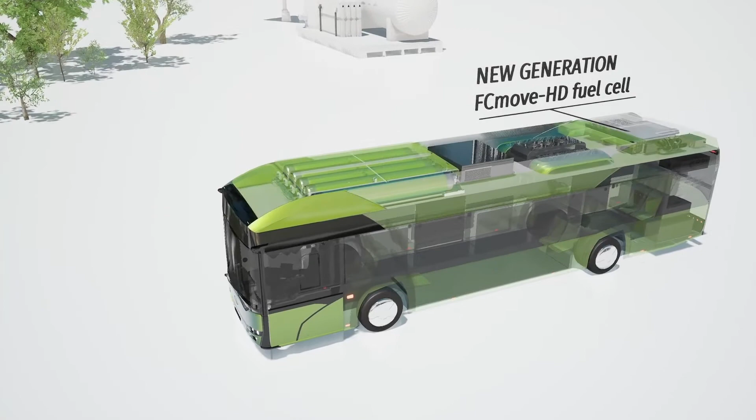Okay, well, we have discussed a little bit about the history of the fuel cell. We have discussed a little bit about hydrogen, but now we should focus on what happens inside the fuel cell, inside this small magic box. So, if you think about the fuel cell, it's not only a fuel cell, it's a fuel cell assembly. Inside, you have fuel cells grouped in the stacks, but also you have BOP, which stands for balance of plant. And these are the components which are responsible for the fuel cell to work.

So, on one hand, you've got a part of the hydrogen system, which is made often of HRB, which is the hydrogen recirculation blower, which is needed for transferring the hydrogen from the cylinders to the stacks. The other thing is that for the whole operation, you also need an air preparation system, which is responsible for delivering the air to the fuel cell. And because of the chemical reaction happening inside the fuel cell, you also need cooling components. From our point of view, in our fuel cell assembly on the bus, you have part of the cooling system, which is the pumps and different valves.

So, when you think about the fuel cell and the fuel cell assembly, please remember that all those components might be inside one place. And if you think about this box and its volume, please remember that this box which is making this power is almost the same or even a little bit smaller than the volume of a standard diesel engine, which is very important for assembly on a bus. But on the bus, we've got different other components which are used for making the bus move.

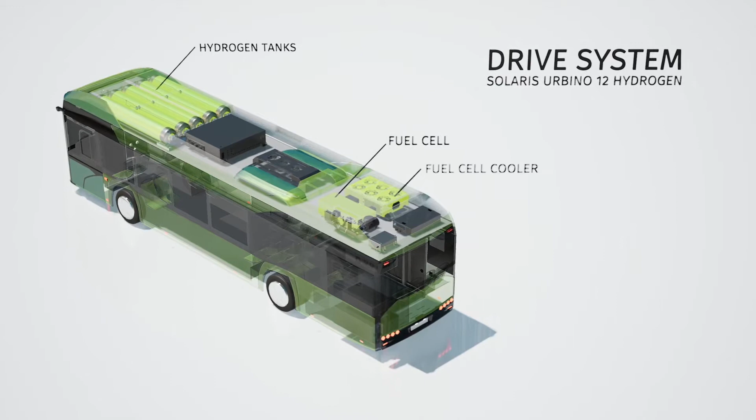From our point of view, you have the fuel cell, and with the fuel cell you have to take the hydrogen tanks. At this moment on our bus, we are using the newest technology, which is Type 4 hydrogen tanks. Besides that, to cover the heat generated by the fuel cell, you have to use a cooling radiator, which on our bus is assembled on the roof. Next, when you make power from the fuel cell, you have to handle the electricity. So we are using a DC-DC converter to change the voltage of the power generated from the fuel cell to the voltage used on the bus.

And for that, we have a traction converter, which is responsible for changing the direction of the flow of electricity, depending on the needs. This electricity may be sent to the batteries for recharging, but can also be sent directly to the axle, which is responsible for driving the bus. And this is the most important fact about our bus, because this is not a classic range extender hydrogen bus. It's a real fuel cell driven bus.

Besides those components, when we think about all the other main components assembled on the bus, we have to remember our air conditioning. On our hydrogen bus, we only use CO2 air conditioning with a heat pump, which means that they are working on CO2 refrigerant, which is the least harmful to the environment today.

So it has the global warming potential of 1. When comparing to other refrigerants, this is the smallest number ever.

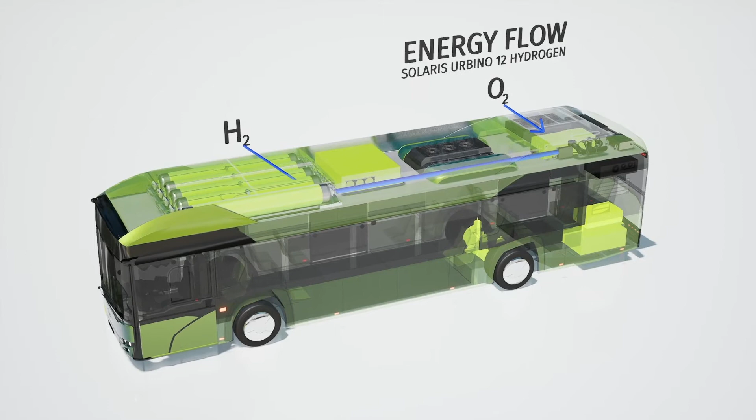But what really happens during driving, and what is the energy flow on the bus like? At the beginning, you have to deliver the hydrogen and the oxygen to the fuel cell. In the next step, inside the fuel cell, electric power and heat, and water steam, a combination of those three aspects, is generated as a result of a chemical reaction.

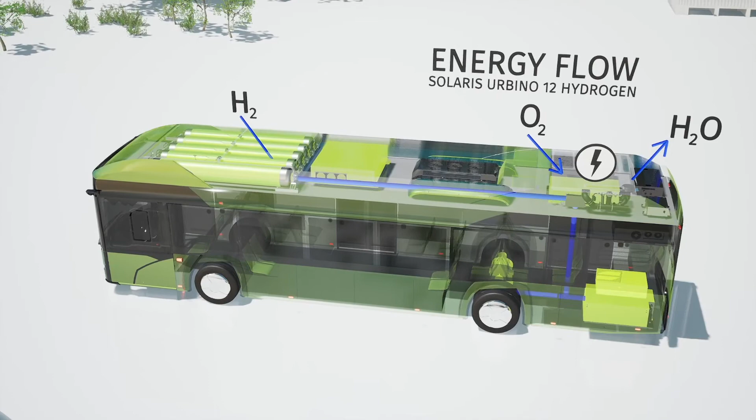The generated electricity is sent to the DC-DC converter and then to the traction converter, and depending on the needs, to different components. Because of that, our bus is moving without any signs of emission. And this is a general overview of the bus.

But when we focus really on the fuel cell, we can explain in a very short way how it works. As we have been saying before, at the beginning, the hydrogen and the oxygen are transferred to the fuel cell. The hydrogen reaches the catalyst and splits into protons and electrons.

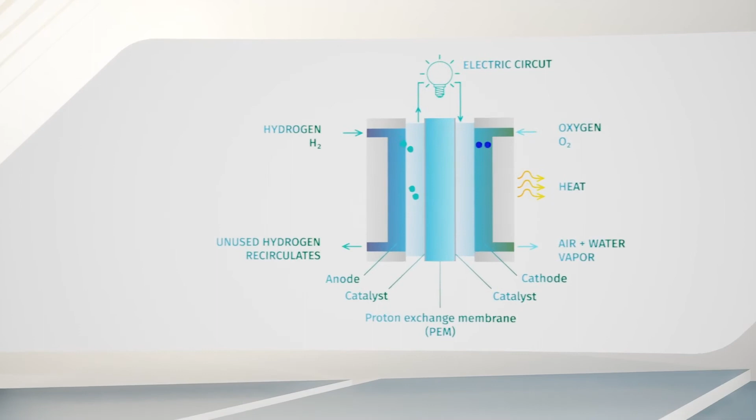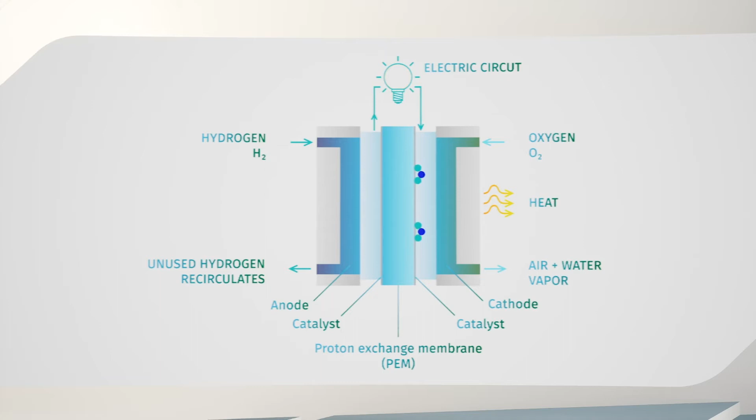And because we are using a PEM fuel cell, which stands for proton exchange membrane fuel cell, it lets through the protons to permeate to the other side. The electrons are captured and sent to an external circuit, where the circuit leads to our bus and to the DC-DC converter. The protons of the hydrogen, which go to the other side, to the catalyst on the cathode side, then contact the oxygen and create water and heat.

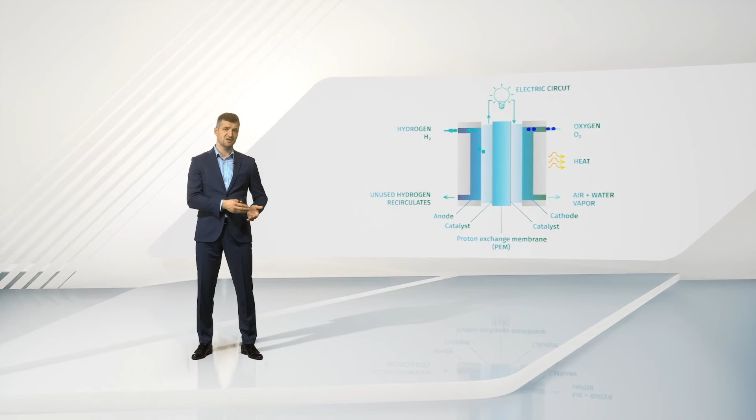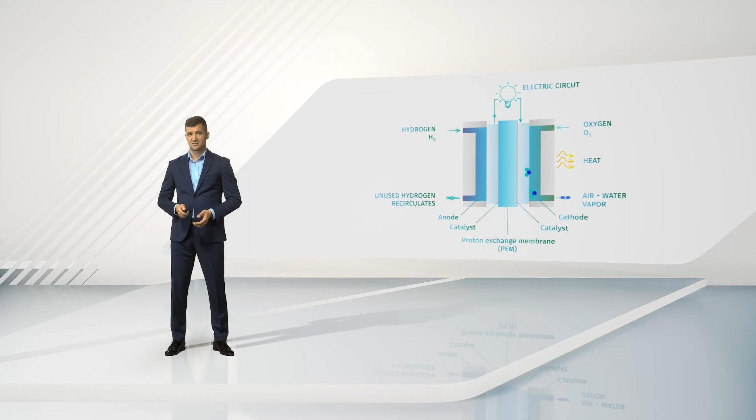And this is how the fuel cell mainly works. So, as we have been saying before, on one side you have clean hydrogen and clean oxygen, and at the exhaust side you just have a little bit of water, and that's it. This is the way the fuel cell is working today.

Depending on different suppliers, the fuel cell may have different parameters, and also it's because you have different needs. In our bus, we are using a fuel cell with power of 70 kilowatts. The efficiency of the fuel cell is very high, up to 57%, and the estimated lifetime of a fuel cell is over 30,000 working hours.

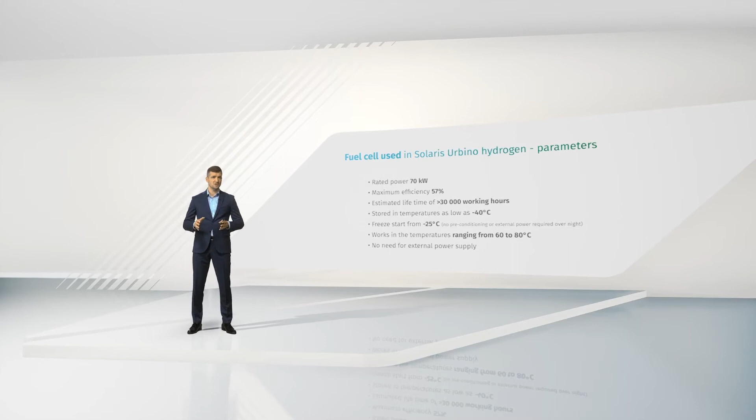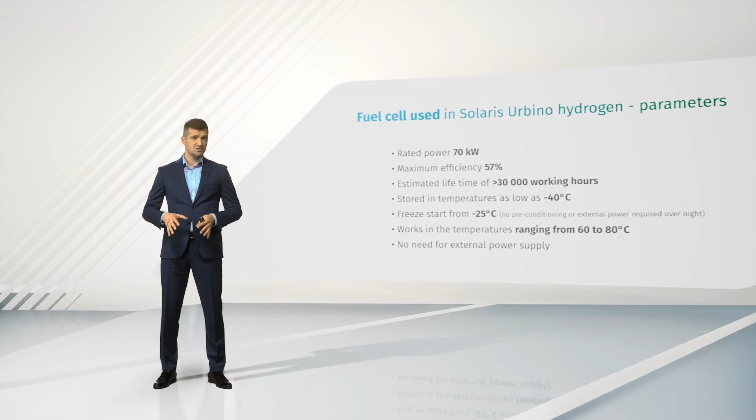Of course, except that, the fuel cell has different advantages. The one which we are using now is the 7th generation of fuel cells from our suppliers, so they have really spent plenty of time working on it.

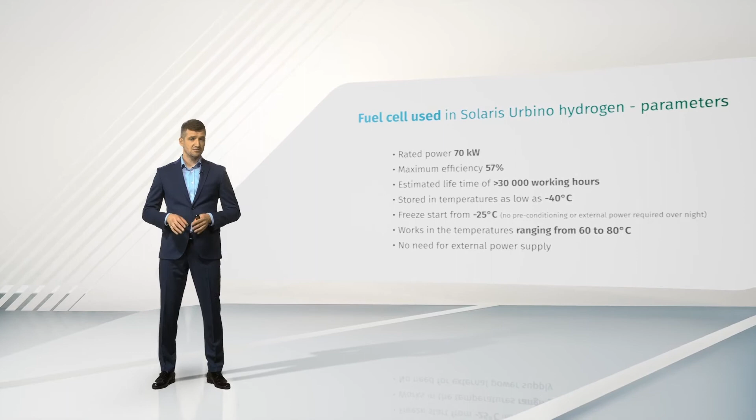So what we can say today also is that the fuel cell might be stored in very low temperatures. It can be stored down to minus 40 degrees. And when you are operating the bus, it can be operated from minus 25 degrees up. This is very important because previous fuel cells used to need power supply before taking off with the bus.

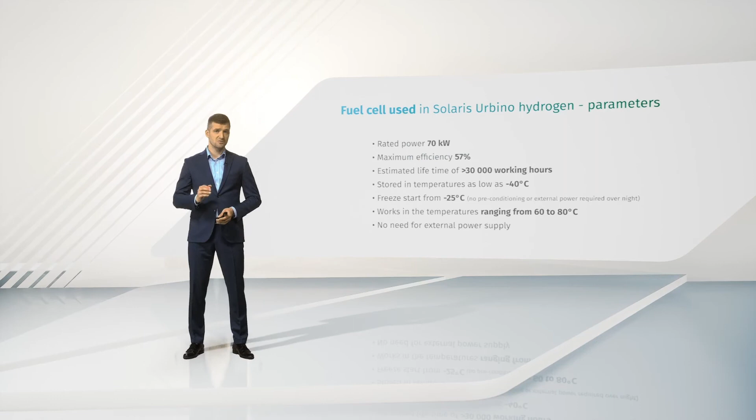Which means if you wanted to drive, you had to connect to an external power supply or do something different to heat the inside of the fuel cell a little bit. Today, our bus doesn't have to have any operation like this. It's just working as you want it to from minus 25 degrees up.

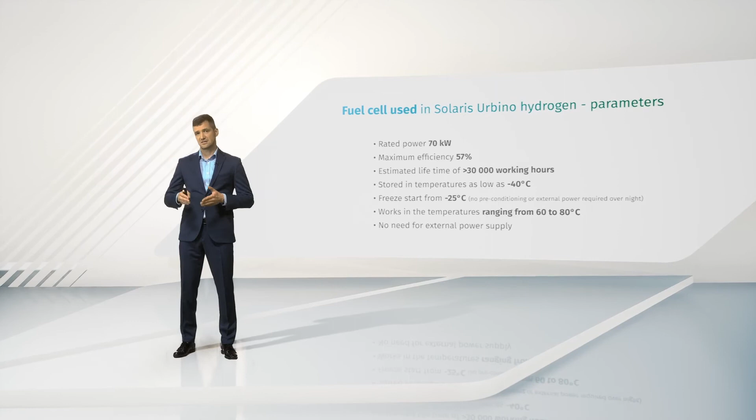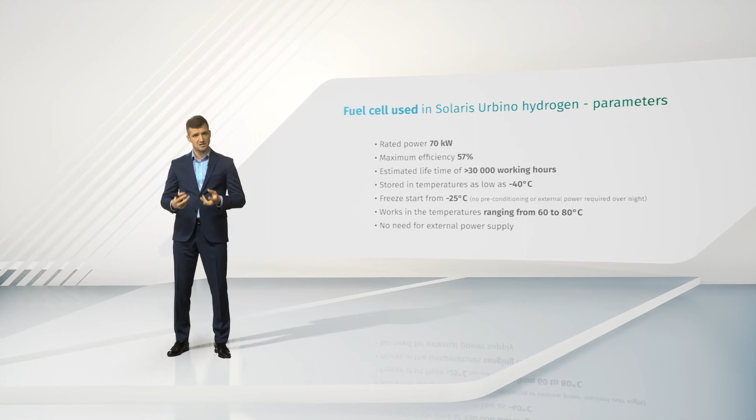Another important thing when we think about the fuel cell is the coolant temperature inside. It's also much closer to the coolant temperature which you have today in the diesel engine, so taking heat from this coolant is much easier than it was before. The coolant temperature range is between 60 and 80 degrees inside the fuel cell.

And this is one thing, the fuel cell. But in our world today, there are different manufacturers of the fuel cell. Depending on the customer, depending on the manufacturer, there are different reasons and different options to make it the way the customer wants it to have.

But this is not the best solution. That's why we are joining today StasHH, which stands for Standard-Sized Heavy-duty Hydrogen. We would like to finish this program together and have a very good product in the end.

And he goes to the back, comes back in half an hour and says, sorry, we haven't got those. This is just imagination, because today you go to the shop and buy an AA battery. Imagine now if it was the same with the fuel cell - if you want a fuel cell of type AA, you put it on the bus, connect it, and it works, from different manufacturers. In the end, the market is so big, there are so many AA-sized fuel cells that you can make more of them, more buses, more different applications. This is the reason why we are in StasHH, and why we think StasHH will succeed.

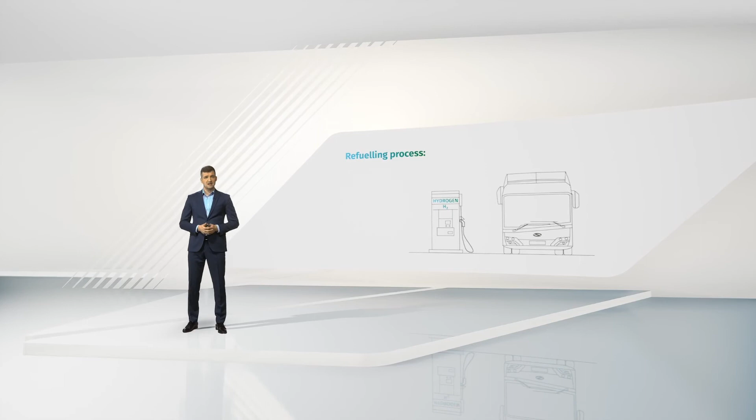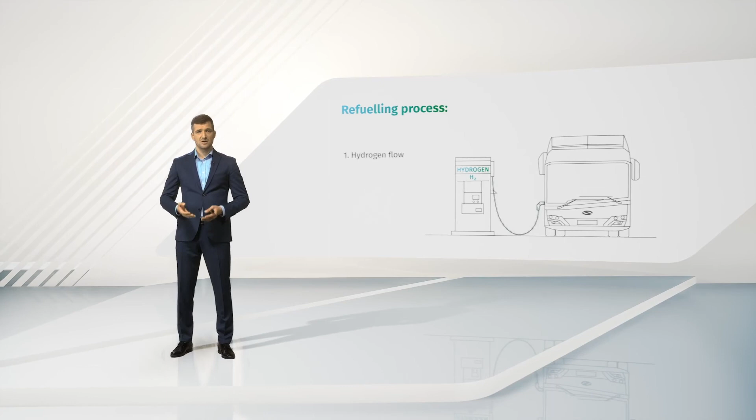But we have described fuel cells, buses, different projects. But one more thing we should remember is the hydrogen which is going to be sent to the bus, because you have to refill the bus. From our point of view, on Solaris buses, you have a nozzle capable of a very high flow, and this high flow can be up to 120 grams per second.

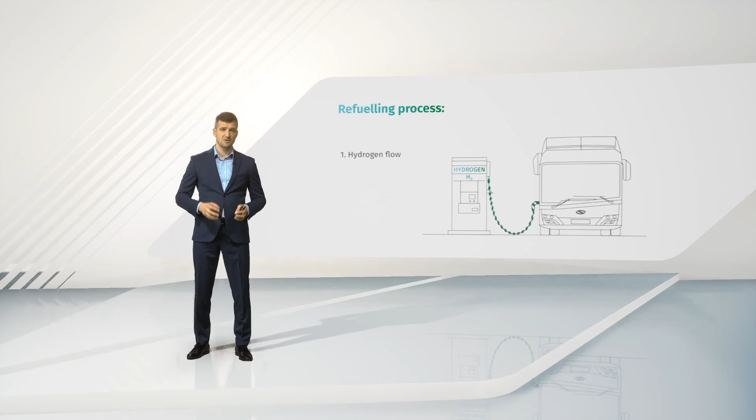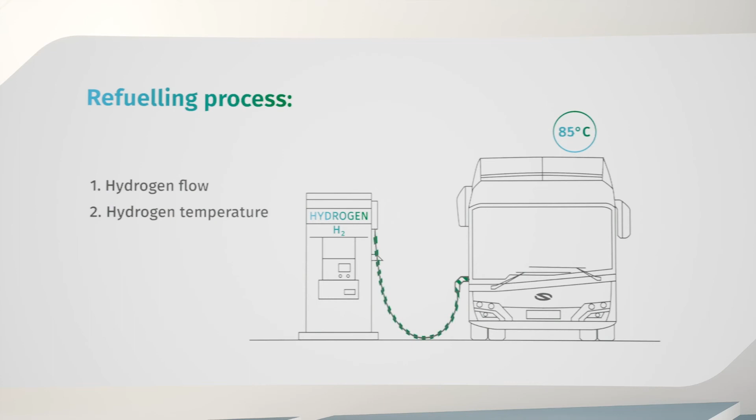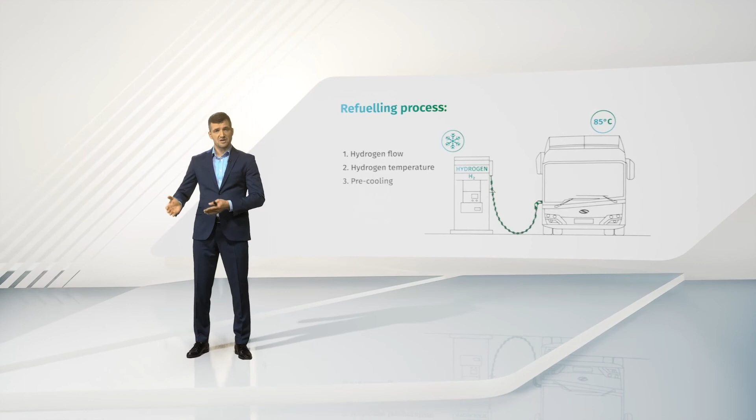But as usually happens, when you compress hydrogen inside the cylinders, it heats up, and you also have to remember the temperature of the hydrogen inside the bus cannot exceed 85 degrees. So to have better performance during refueling, we recommend having some kind of chilled hydrogen at the hydrogen refueling station. Because of that, you may have all the advantages of the high flow of 120 grams per second, and the capacity we have today of 37.5 kilograms on the bus.

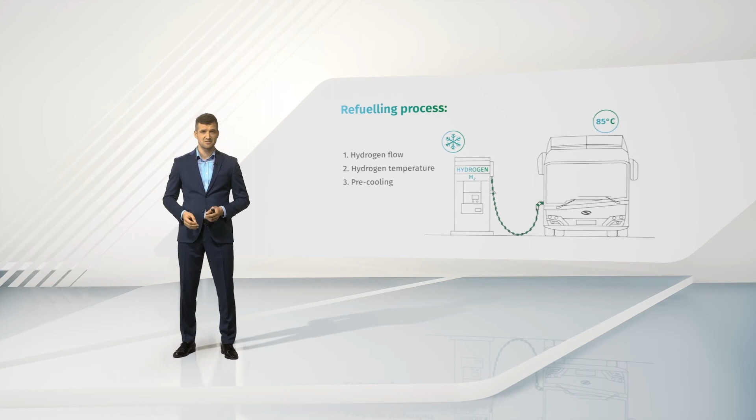If you make a short calculation, you'll know you can refill the bus in less than 6 minutes. But the 6 minutes can only be achieved with pre-cooled hydrogen. But that's another side of it.

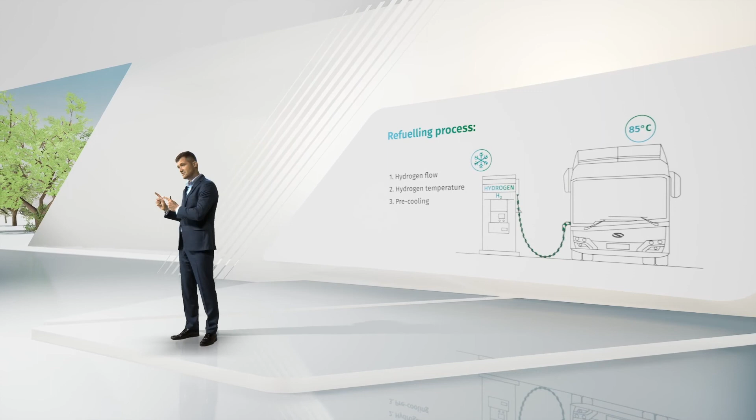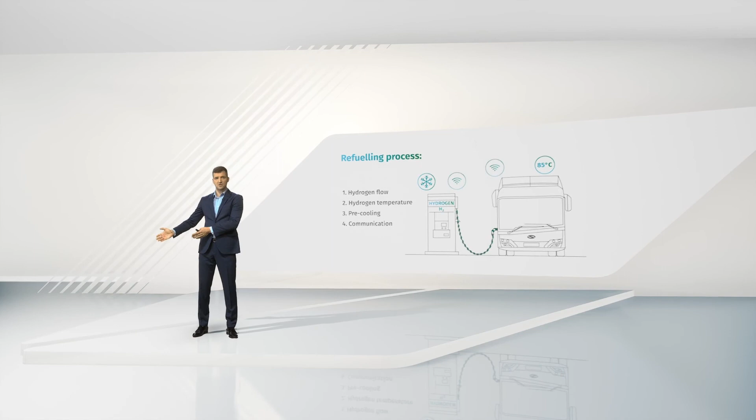The other thing is that when you refill the bus, as we've been saying, the flow goes to the cylinder and heats up a little bit. It's always good to let the hydrogen refueling station know about that. That's why we have communication between the bus and the refueling station, letting it know about the temperature of the hydrogen in the bus, the flow of hydrogen to the bus, and the amount of hydrogen already in the cylinders. Because of this communication, you can refill faster, better, and more efficiently.

From our point of view at Solaris, we always have this option on our bus, and we have had that option since 2014 when we made the first buses.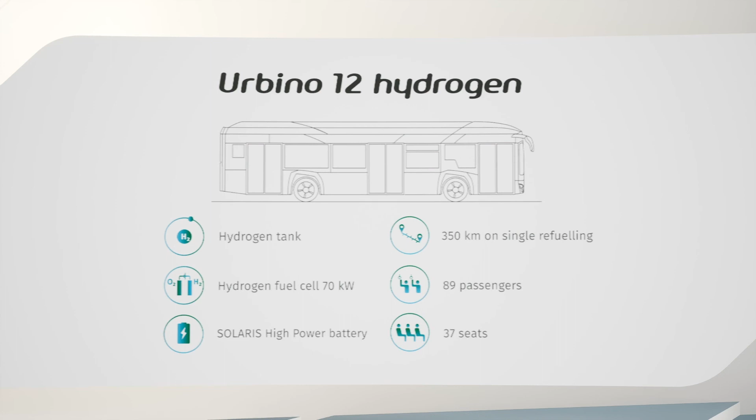So to sum up our solution, when we think about our bus, we use the newest technology when it comes to hydrogen tanks - we have Type 4 hydrogen cylinders. The other thing is we use the exact amount of power from the fuel cell that we need, which is 70 kilowatts. That, added with Solaris's high-powered traction battery, capable of very fast discharging and charging, gives you a very good bus with a total range of about 350 kilometers depending on circumstances and environment. You can carry up to 89 passengers with 37 seated.

When you compare these kinds of buses between electric and hydrogen, for example, you can see what the difference is regarding passengers.

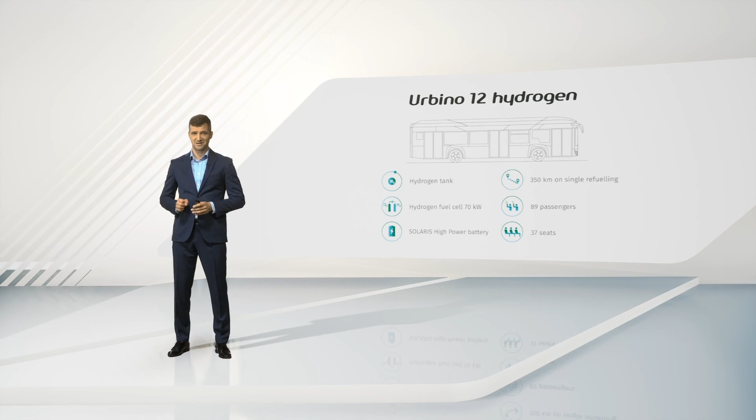So what is important on the Solaris Urbino 12-meter hydrogen bus? You have an extended range, very fast refueling, and a reduction of energy because of the CO2 air conditioning and other components, and altogether it's made in an efficient, free drive mode.

This is the reason why we made this product, and why we think hydrogen is part of the future. From our point of view, we don't want to stop here.

I don't know if you've heard before, but we are going to make another type of hydrogen bus. Next year will be the year of the 18-meter Solaris articulated hydrogen bus, and it will be the first bus with something I cannot tell you now because it's still a secret, but stay tuned and let us meet together in a new zero-emission future next year.